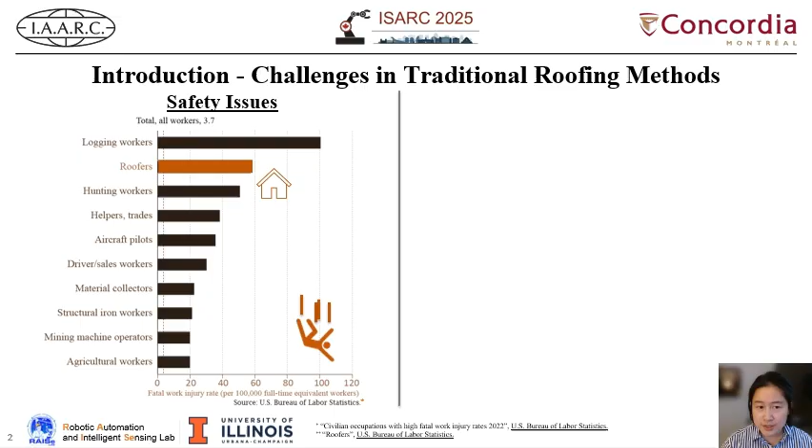Roofing is one of the most dangerous occupations in the construction industry. According to the Bureau of Labor Statistics, roofers face extremely high fatal work injury rates, among the highest of all occupations. Beyond safety concerns, the industry faces severe labor shortages, with over 12,000 openings projected annually from 2022 to 2032. Traditional approaches also suffer from time-consuming training requirements, high labor costs, and quality inconsistencies. These challenges present a clear need for innovative solutions.

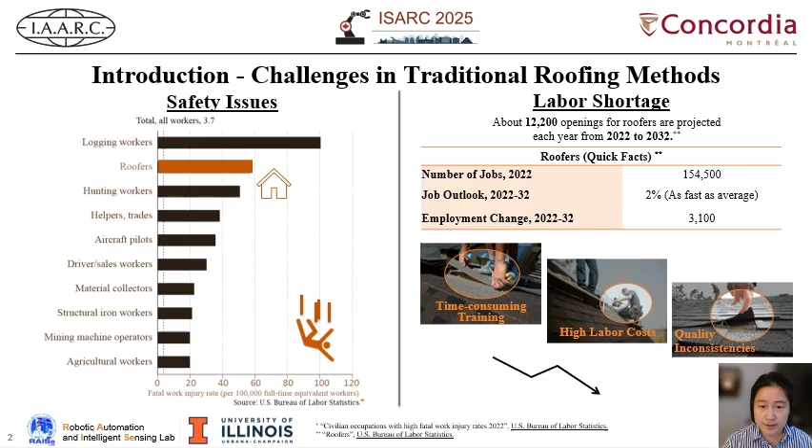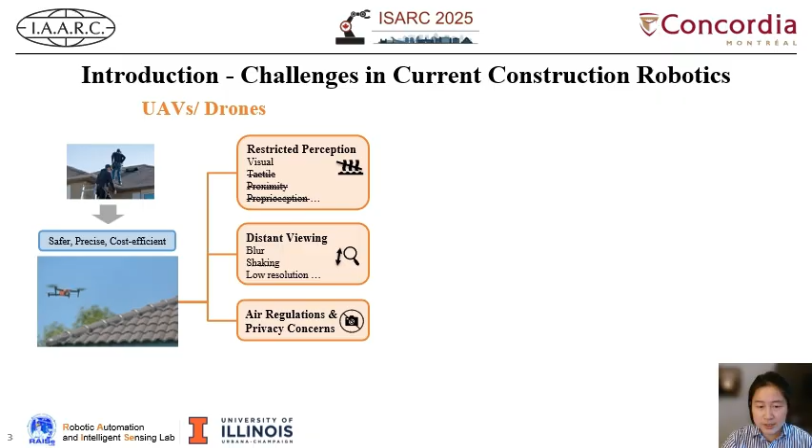Researchers have explored robotic alternatives, most through UAVs or drones and UGVs or ground vehicles. However, each has significant limitations. UAVs offer advantages like safer operation, but suffer from restricted perception capabilities, limited visual quality at distance, regulatory constraints, and short battery life. UGVs address many of these limitations through enhanced perception capabilities, close-up inspection abilities, fewer regulatory hurdles, and longer operational durations. Among UGVs, designs include wheel-based, track-based, and leg-based systems, each with their own advantages.

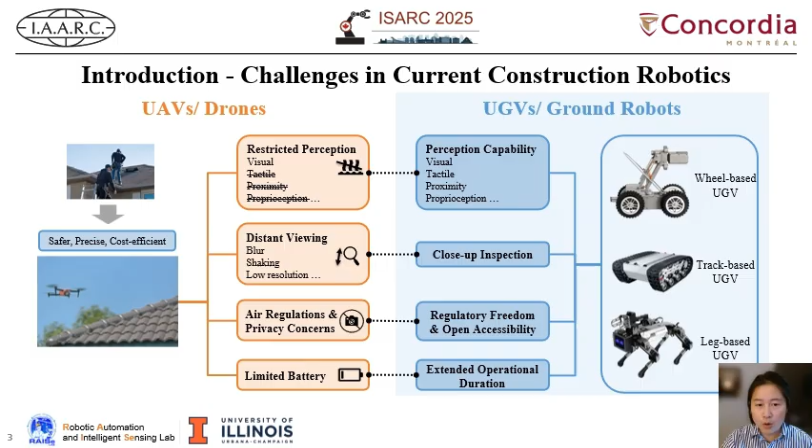While existing UGV solutions show promise, there still remain significant research gaps. Current UGV solutions still experience perception limitations and safety issues, particularly regarding navigating roof slopes, detecting edges, and avoiding collisions.

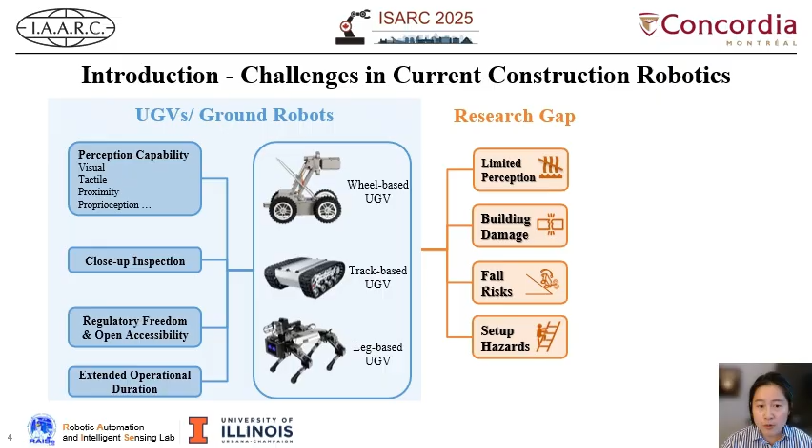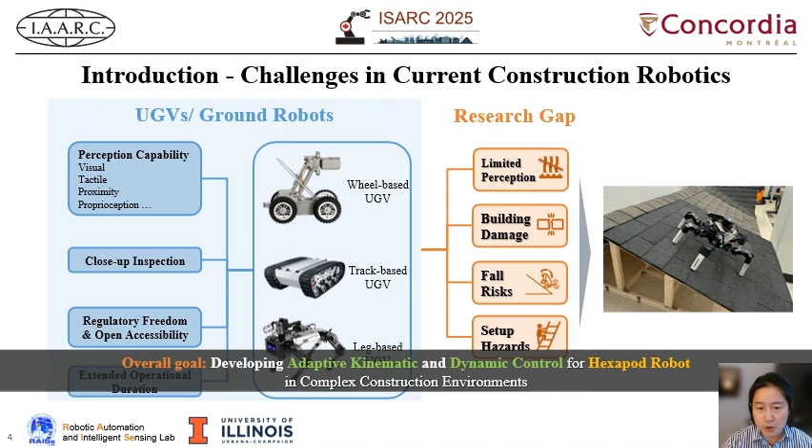Our solution was inspired by Spider-Man. We aim to bridge these gaps by developing a specialized hexapod robot system, which has 6 legs that can stably navigate and inspect roof structures. The key innovation is combining adaptive kinematic with dynamic control in a leg-based platform.

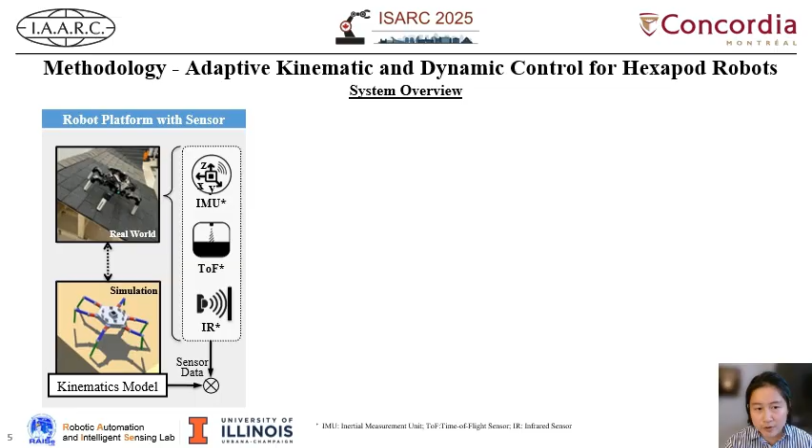Our system consists of 2 major components: the robotic platform with integrated sensors and the control system. The platform uses IMU, TOF, and infrared sensors to perceive its environment. The control system has 2 primary modules: the gait stability enhancement module, and the slope posture control module.

The gait stability enhancement system uses Bézier curve-based trajectory generation for smoother, more energy-efficient leg movements compared to traditional trajectories. The slope adaptive posture control system uses a fuzzy PD controller that can dynamically adjust leg motor angles based on center of gravity errors.

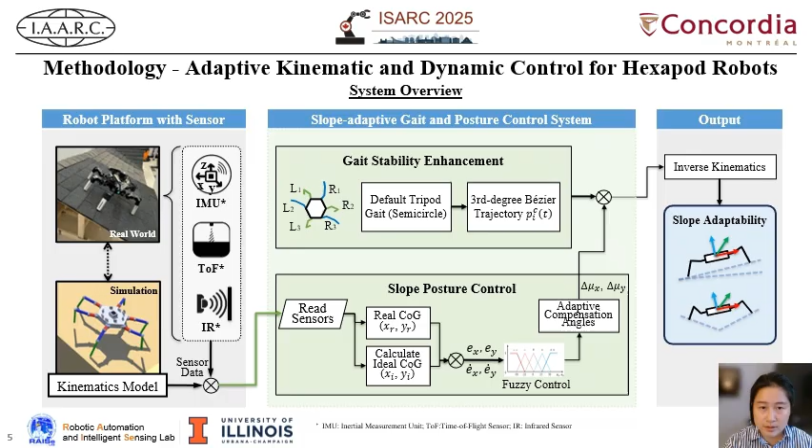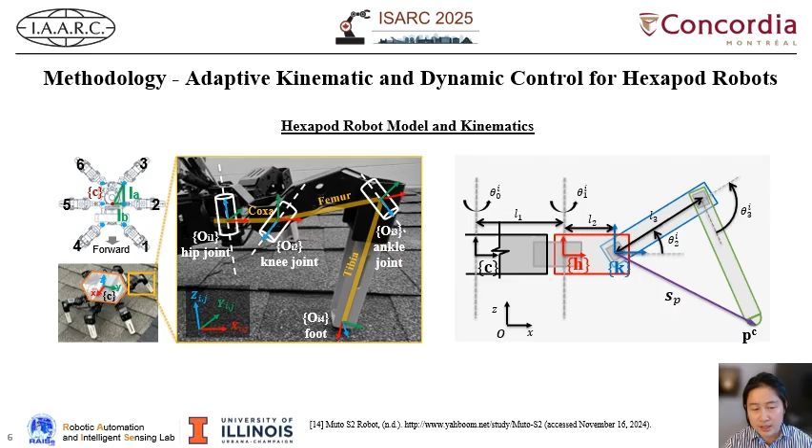We use the Muto hexapod robot with 18 degrees of freedom, 3 per leg. The robot measures 465 millimeters in length and 514 millimeters in width. Each leg has 3 segments: coxa, femur, and tibia. We established coordinate frames for kinematic modeling and implemented both forward and inverse kinematics for precise motion control.

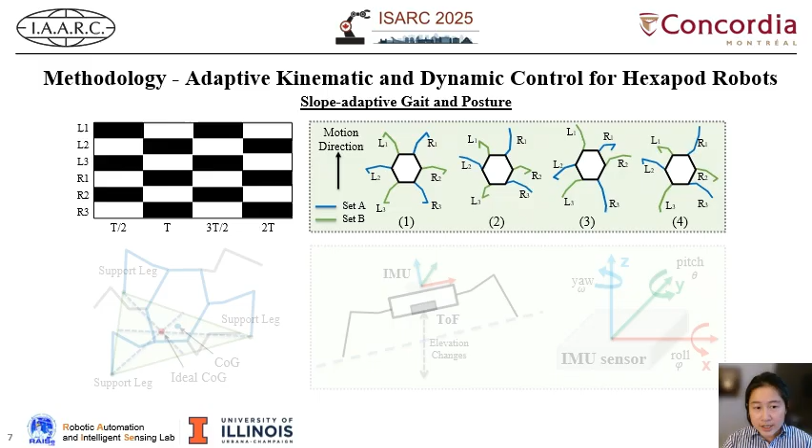The robot uses a tripod gait for stability. 3 legs always maintain ground contact while the other 3 swing forward. Our key innovation is maintaining the center of gravity within the convex support polygon using real-time adjustment.

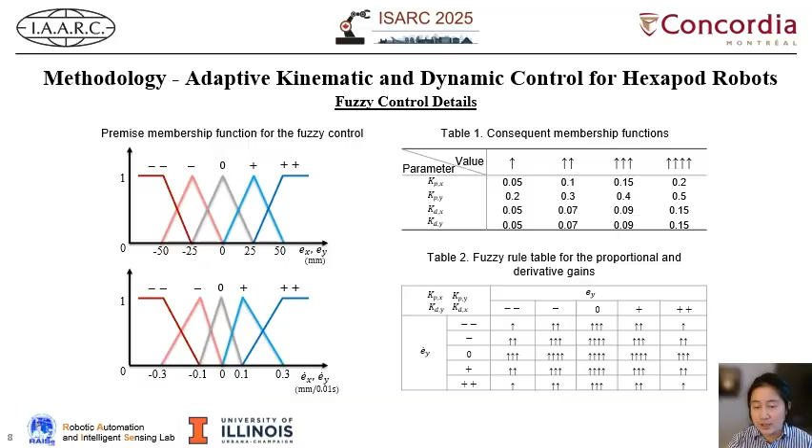For evaluation, we equipped our Hexapod with multiple sensors, including an IMU for orientation detection, TOF for positioning, and infrared sensors for edge detection. The control system continuously monitors the support pattern and projected center of gravity to ensure stability during movement. We evaluated our system through extensive simulations.

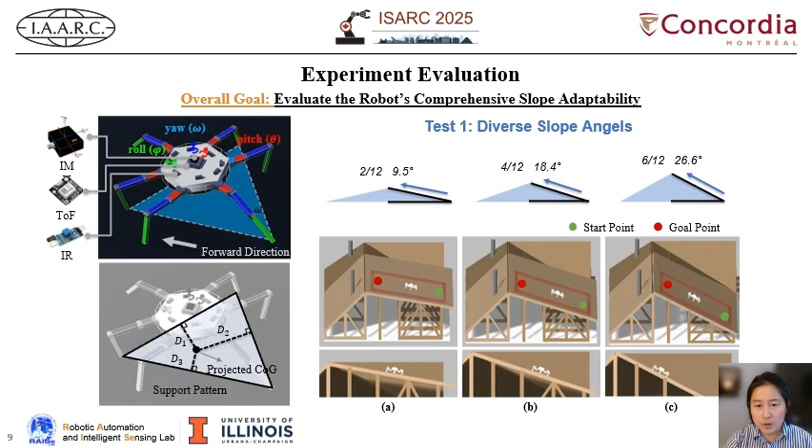Test 1 evaluated the performance on 3 roof pitches, which are 2/12, 4/12, and 6/12. These represent common residential roof slopes. Test 2 assessed the robot's ability to navigate structural transitions: ridge lines at 30-degree angles, valleys at 135 degrees, and flashing interfaces with 10 millimeter elevation changes. These represent critical challenges in real roof inspection.

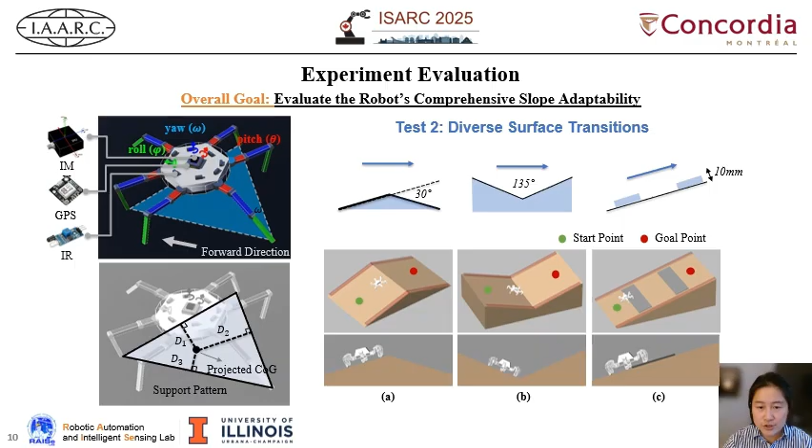Our results show significant improvements. On 2/12 pitch, we achieved 21% better stability margin compared to the default control system. The improvement was 15% on 4/12 pitch. Remarkably, on the steepest 6/12 pitch, our system maintained stable locomotion while the default system failed completely.

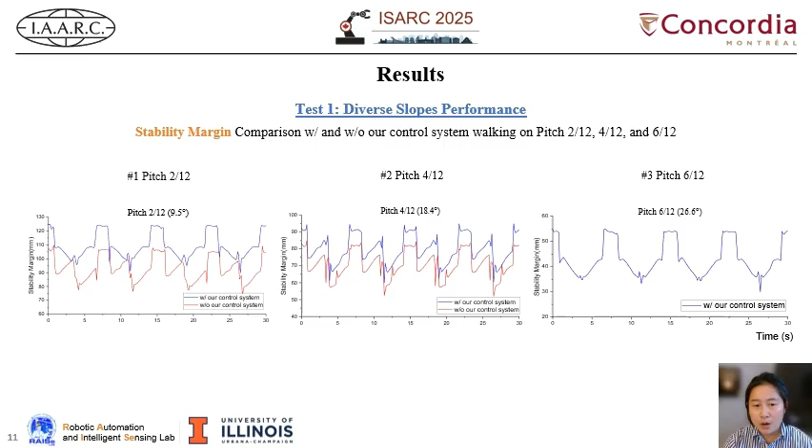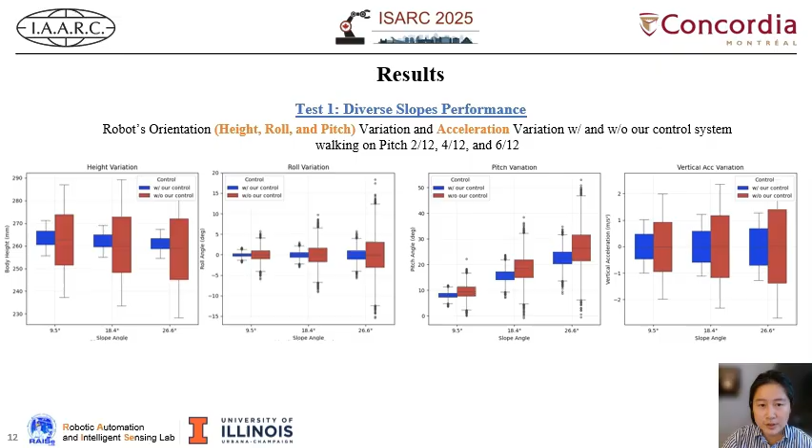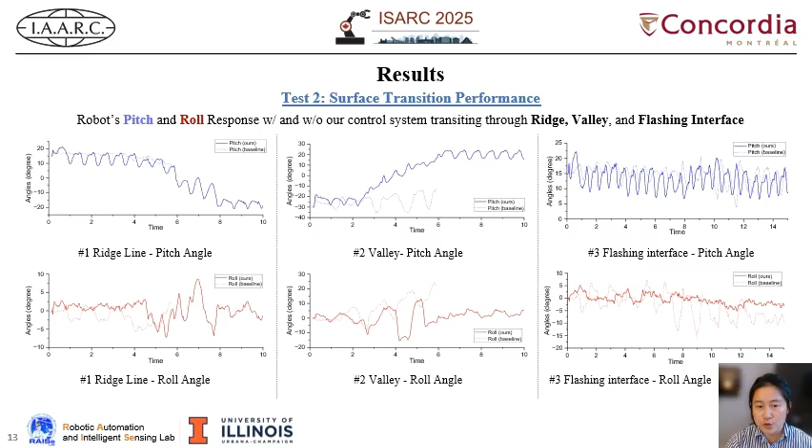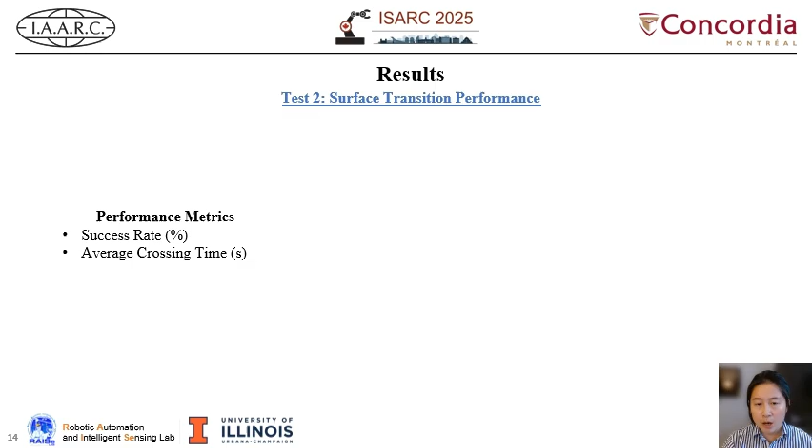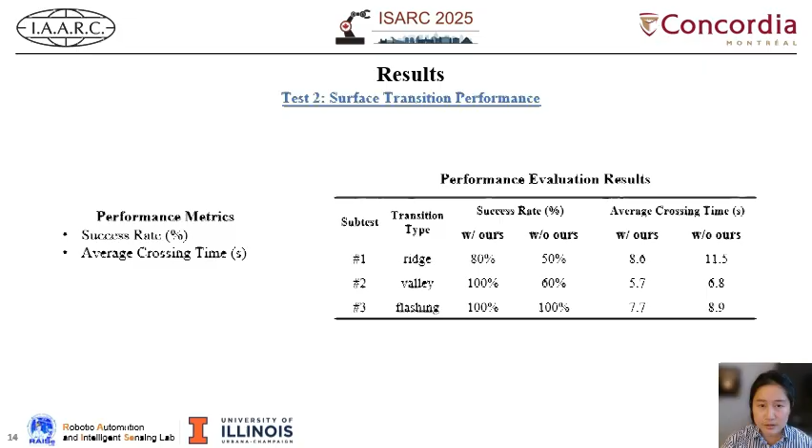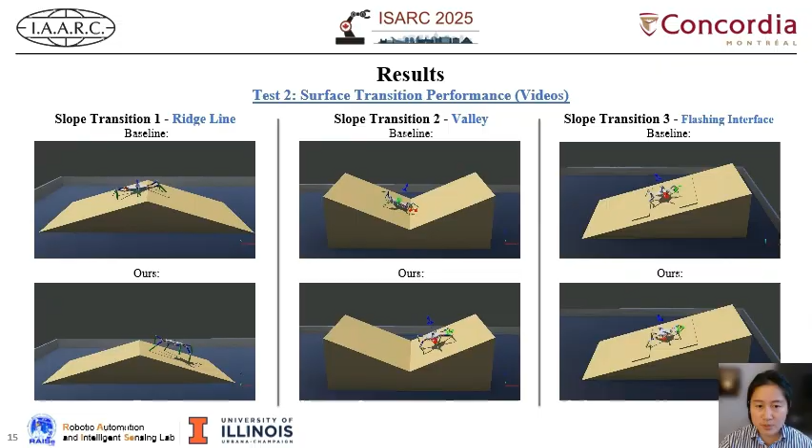Here we can see video comparisons of our system versus the baseline, navigating these transitions. Notice the smoother, more stable movement with our control system with a higher success rate.

In conclusion, we have developed an integrated control framework that significantly enhances Hexapod robot performance in construction environments. Our contributions include the novel integration of adaptive fuzzy PD control with Bézier trajectory generation, 21% stability improvement with 80 to 100% success on structural transitions, and specialized control for construction inspection tasks.

Limitations include simulation-only validation and reduced performance on extremely steep slopes. Our future work will focus on real-world validation, algorithm enhancement for steeper slopes, and improving energy efficiency for extended operations. This research advances the development of autonomous inspection systems in construction, potentially reducing workers' injuries and improving inspection quality.